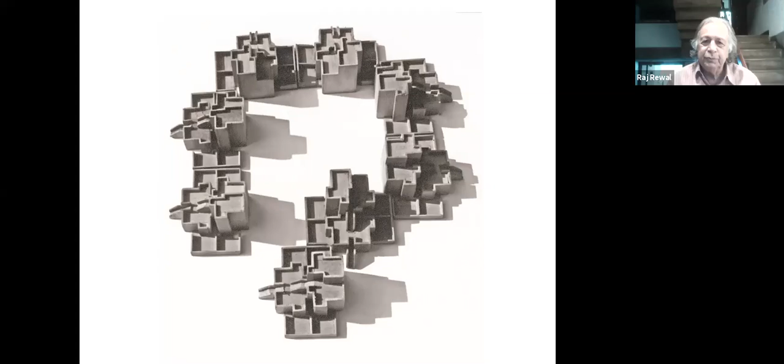Okay, you can see the plan there. I think if you can remove this—these are just the ground floor. What gave me a lot of pleasure, as well as being problematic, was how to create spaces around this building, because we wanted it to be really like the old mahallas or places in urban cities, so people can meet each other. In a way, we created internal spaces which are a very important part of the design. Next.

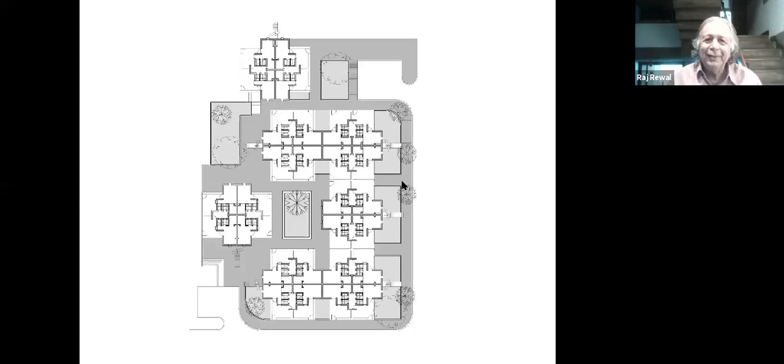I can do it. So these are really two-room units which are combined together, and you can see the plans of different kinds. So these are really like molecules which are combined.

Can you go back to the earlier image? Ashwarya, are you hearing me? Yes sir, I can hear you. I think this is because of the internet lag that you are not able to see. So now it will be fine. Oh, so it takes a few seconds.

As you can see, this is a sort of image. Let's say this is a 2 or 3 story house. There's a courtyard ground below for the individuals and a roof terrace above, and a common passage which runs through the whole scheme. Now that's another image, as you can see.

I wanted a very rough render on the project, but defined with ceramic tiles. So I thought even if there's a lot of rain and all sorts of things which go on and nobody repairs it, it should look good after, let's say, a few years. So that was the idea. Next.

As you can see, the spaces in between are very important. And there's another type, slightly higher level, maybe 2.5 rooms. You can see the series of gateways which run through this passage.

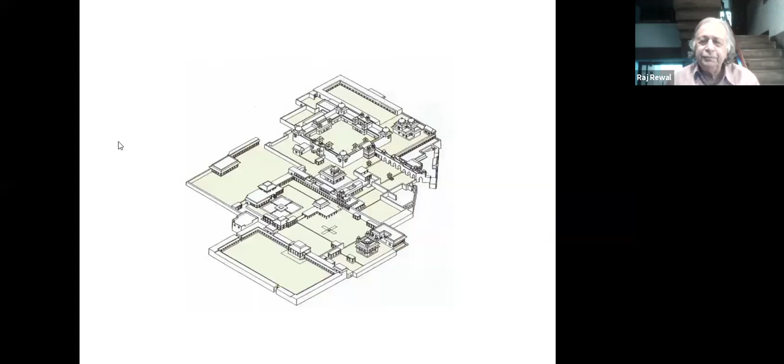Ashwarya, you can go a little faster. Now I come immediately to a very different kind of work to show the space. In this case, the space is of the Parliament Library building. There are 3 courtyards within it, and that's the kind of space. So the space sort of binds all the different architecture together. Next.

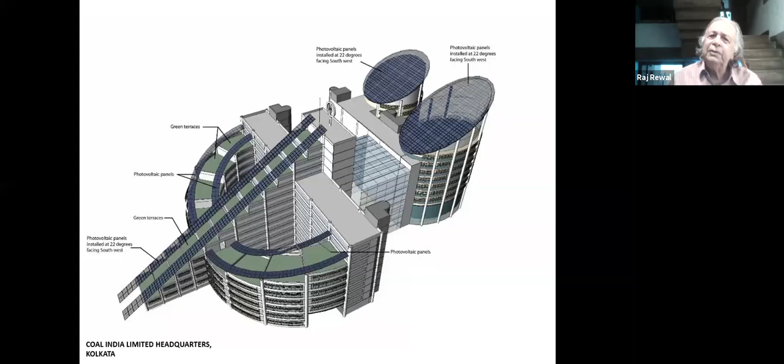I do that. Can you see me when I do that?

Okay, now this is the Coal India headquarters, as you can see, panels all around the building, and about 15 to 20% of the energy used in the complex is generated by the panels.

We avoided in all of these projects the battery, because the power generated goes directly into the system and then it lights up. So it saves a lot of money.

But I think now the batteries which are being suggested or which have been built are also very powerful, and I think there can be enough power generation. In the next 10 years, I hope that we may have entire cities entirely based on photovoltaic panels, recyclable systems, etc.

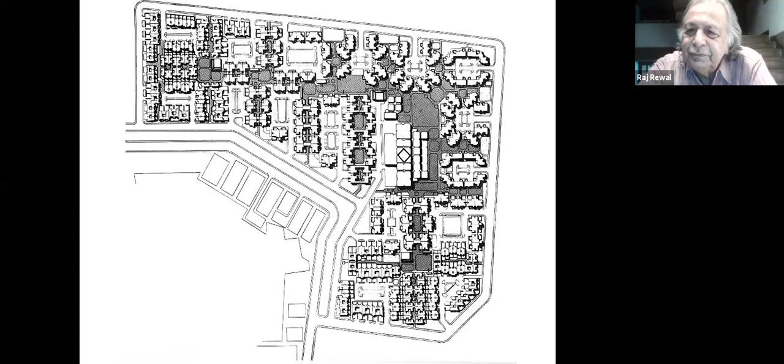This is the plan of the Asian Games Village. The shaded areas, the gray areas, are the pedestrian pathways which run through the entire building.

Now we show another housing which is very different in character. This is for the British High Commission. There's a lot more money and much more, but we used sandstone there, and you'd see how it works out. But the principal ideas are often the same - a central courtyard or central open space, with everybody having their own courtyard and roof terrace, etc.

I'll talk about other things once we've completed part of the presentation. I don't find a problem with it - in fact I try to keep the palette, or the sandstone in this case, of one color, so that the scheme is unified very well. The volumes and all that are a bit more lively, with chhatris, balconies, protruding elements, etc.

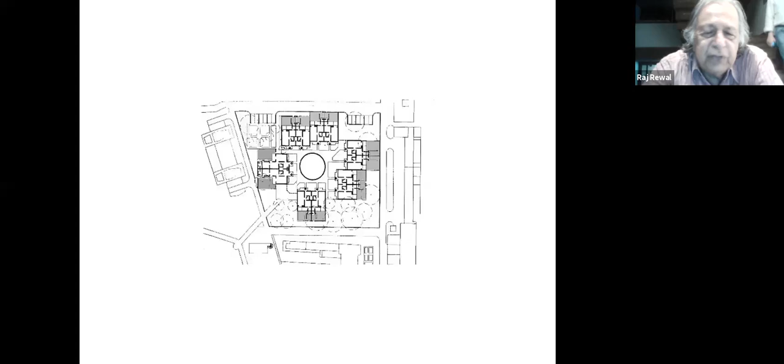I use sandstone very much, but there are two reasons. In my first building, I used brick and concrete as a kind of modernistic approach, a truth to the material. But whenever I started using air-conditioned buildings, I thought we need extra insulation. If sandstone is used on the surface, there is extra insulation, so for air conditioning buildings it makes a lot of difference. Also, sandstone is a material particularly, I think, very valid.

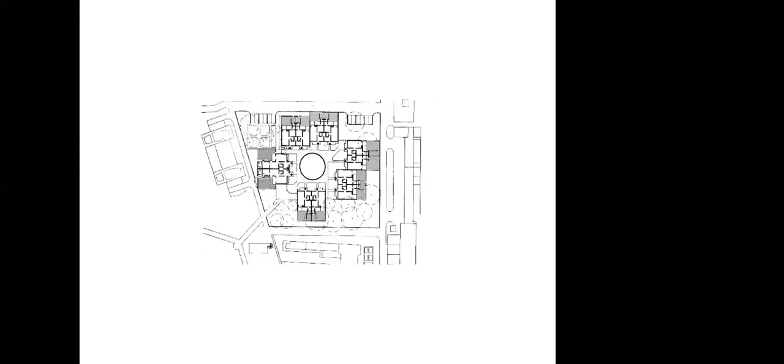You can see the little balconies and the manner they have been used to create a bit of shade, to shade the building themselves and create a bit of microclimate, and to do it in a manner that the whole building has a slightly, if I may use the words, sculptural quality.

Very carefully in all of our works, we work out the details to a great extent.

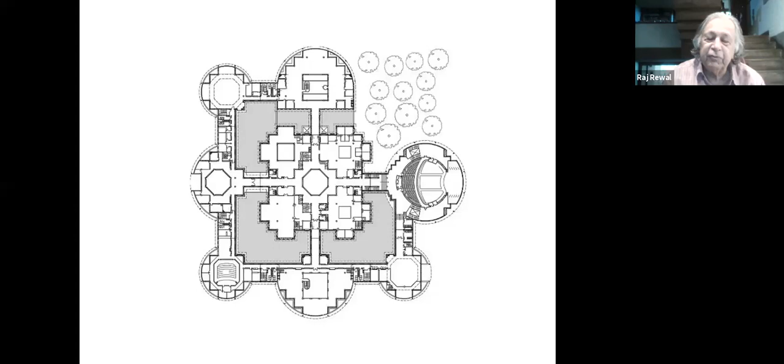You can see the building plan, a series of courtyards and circular external volumes, which in a way resonate with the existing circular building of the Parliament.

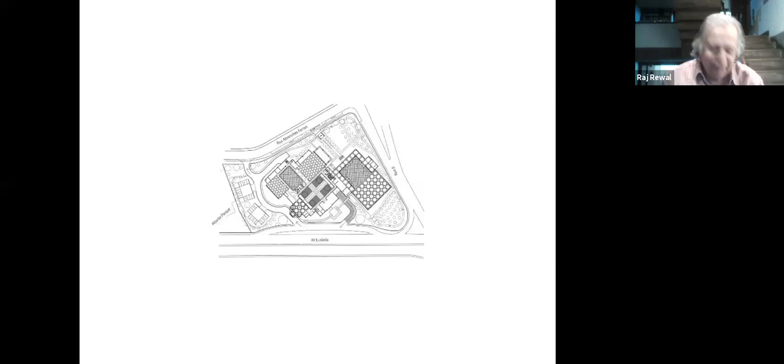Okay, next you can see a little bit of the images, and then we come back to the questions and answers after another 5 minutes. Let's run through this very quickly. Aishwarya, I think he wants you to run through the images. Yes, can you rush through please? Oh, my internet connection is unstable again, they say.

Okay, you can see the kind of drawings which we had done to capture the mood of what we wanted to do.

Oh okay, we do this project and then we finish, and then question answer.

Okay, this is a project very accessible to anyone - you just have to ask our office and you can come and see it. And it's exceptionally well maintained, something to be said for the Indian scientific community.

There is a central courtyard, and there is a series of housing clusters which have their own identity and courtyard. I think I'll come back to the question answers a little later.

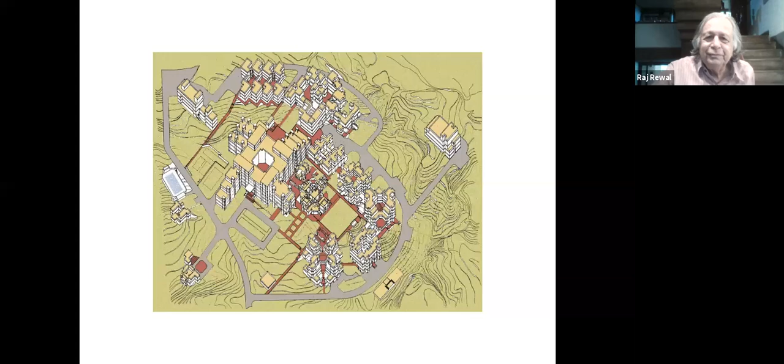Okay, let's carry on, you can see very quickly. I hope most of you have seen NII, but this is the housing clusters. You can see the plan of the whole housing. This is the second phase of the same NII, and then we will go over it inside, how the space progresses from one side to the other.

Now we are very lucky that the landscape has really come up. I was very lucky to have Shaheer, Mohammed Shaheer, as our consultant for this project, and some of the ideas we discussed very well. I think the plants and the buildings are very closely threaded together.

You can see the details. Okay, one more project, I think, because that changes things - there are no domes here, as you can see. We're ready to listen to you for however long you can speak, sir. So these...

We get back to the problem - you can see here we have used photovoltaic panels as a major element of design. The solar disk, as I would call it, slanting one above the auditorium and the library, kind of symbolizes - some people have called it the Buddhist Dharma Chakra, others the Konarak Wheel Temple. The symbols can be read in any way you like, but for me it was a structurally very strong way - a wheel and photovoltaic panels to generate enough power and electricity for the entire project.

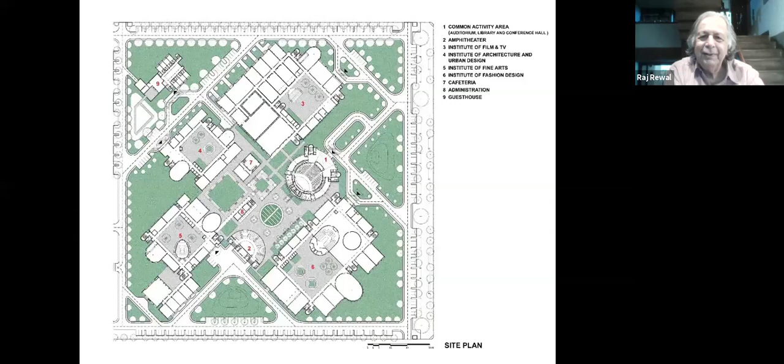You can see the sunken courtyard where your professor can talk to you in a more informal manner.

Aishwarya, then we'll show one or two more images. Net connection is unstable again. So shall we stop here? We can hear you, don't worry sir. These are the last few images, sir.

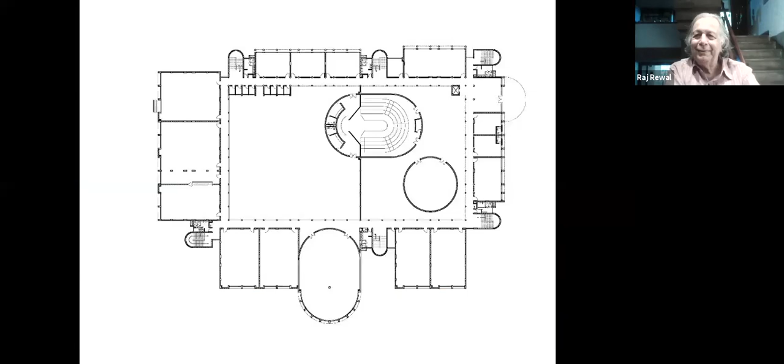So this is the last image. You can see the structure of it and the section you have seen, and how we conceptualized the whole project. This is the dominant feature. I think now you can begin to ask questions. Is that right, Geeta? Sure.

Okay, so I think that was quite a fascinating visual journey for us to see the range of projects that you've done. I know there's a lot more that you could have shown us, but of course we only have an hour to see the highlights. So I have a few questions. There are questions coming continuously, but I'll begin by asking you.

Today's generation, we see people connected so much. We're talking right now online. There are youngsters who can surf the net. There's so much inspiration, case studies, influences, etc. that they can gain from. When you began, it would have been pretty much like a clean slate. Was it lonely? How was it when you started your career? There's somebody called Nirupama and many others who've asked what were the challenges you faced when you began and how you overcame them. So if you can spend a little time telling us about that.